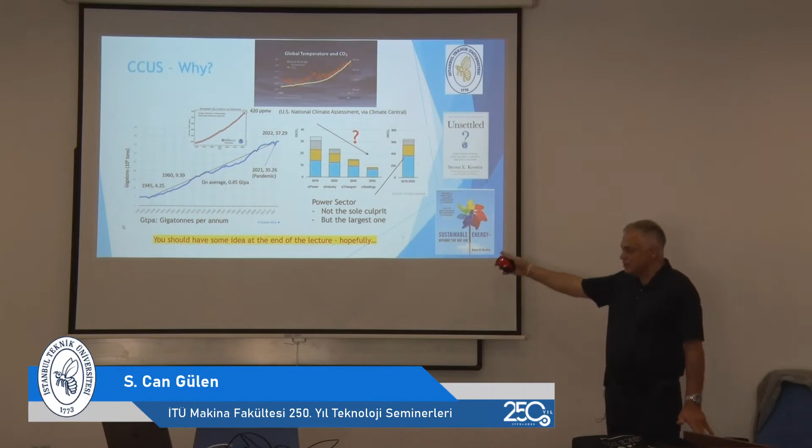I highly recommend looking at that book by Steven Koonin. He's a physicist, and he was a science advisor to the Department of Energy during the Obama administration. He has something to say about these strong conclusions. As far as sustainable energy, this book on the lower right by David MacKay—he passed away several years ago—is by far the best resource to read and understand, and it's available on the web as a free PDF. Download it and read it.

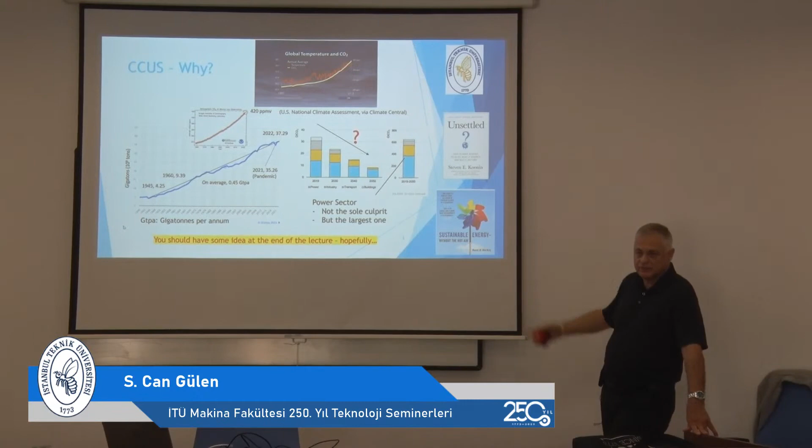In the technology space, as far as carbon capture, you have a feedstock, it's a hydrocarbon fuel. You burn it and make something with it, and the gases that result from that combustion contain carbon dioxide.

In order to mitigate the carbon dioxide associated with that process, you have several possibilities. I'm only showing the most important ones here. Post-combustion carbon capture means capturing the CO2 from the flue gas, the stack gas of power plants. Pre-combustion is basically taking a feedstock like coal, gasifying it to make a syngas, and that syngas, after a water-gas shift reaction, contains CO2 at higher pressure and higher concentration, so it's easier and less expensive to capture.

That's one way. The other way—and there is also a technology recently promoted—is called oxy-fuel combustion. Instead of air, you use oxygen, which of course must be produced first, so again it's an expensive process. But if you do that, the exhaust gas contains only CO2 and H2O, water vapor. As I'll show later, if that can be done in a closed loop system, you can easily capture CO2 by condensing the water out in a water-cooled condenser. Then there is chemical looping, which right now you can read about.

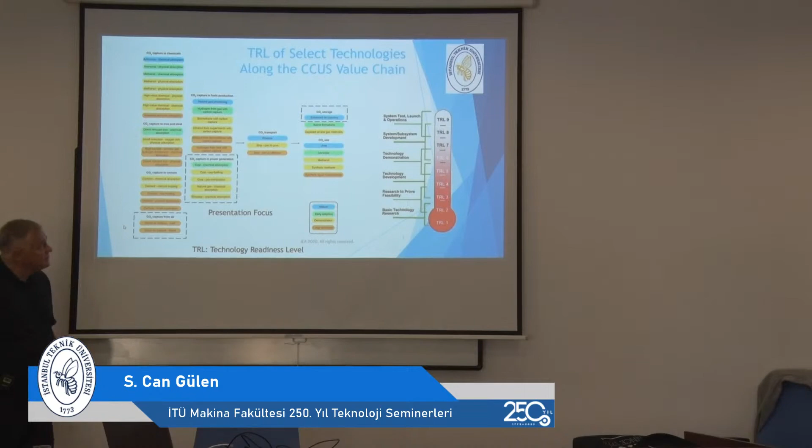I will talk a little bit about the chemical absorption technology to capture the CO2 from the flue gas, and about hydrogen from gas with carbon capture, which is the pre-combustion approach. And then I will talk about enhanced oil recovery, because it's the most used technology to make something with captured CO2 at commercial scale.

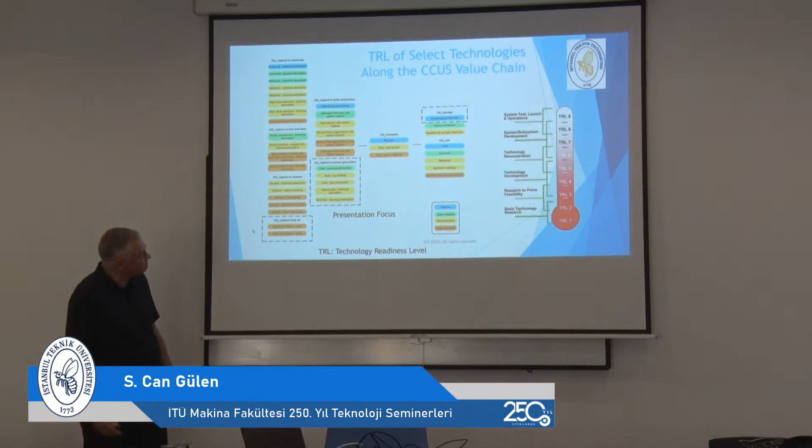Okay, some numbers. Again, in order to be able to talk about the subject, you have to be conversant in the numbers. First of all, today, atmospheric CO2 concentration is measured rigorously since the late 1950s in an observatory in Hawaii. And today, the number is about 420 parts per million by volume, which corresponds to 0.04% by volume in air.

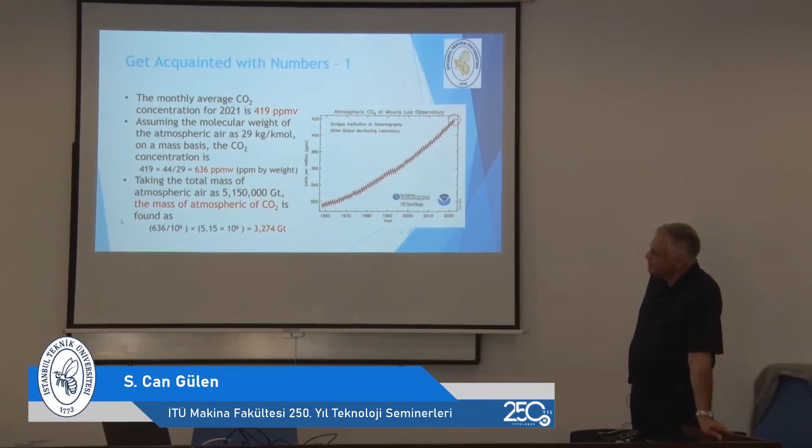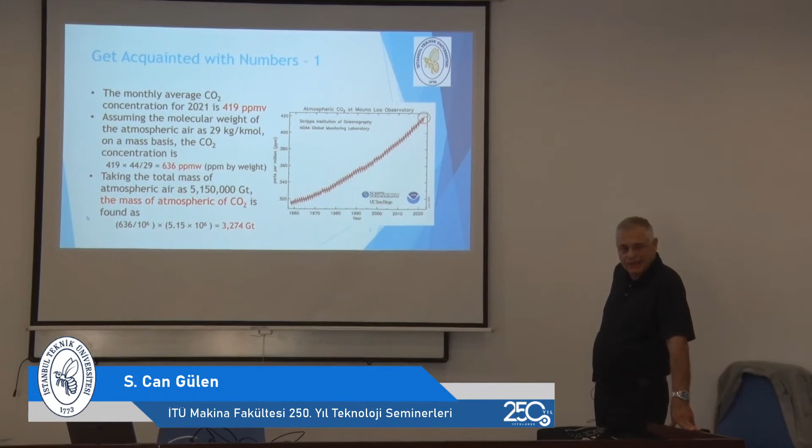By weight, it's about 640 parts per million. Total mass of atmospheric air is about 5 million gigatons. And therefore, you can calculate that there is about 3,300 gigatons of CO2 in the atmosphere. So this is the number that we're talking about that's causing us problems for global warming.

Now, as I said, one way to mitigate CO2 emissions is to eliminate or capture the CO2 in the flue gases from thermic power plants. There are two types of plants today: coal-fired plants and natural gas-fired plants. So if you know the heat rate of the power plant, which is the efficiency, and the lower heating value of the fuel, you can easily calculate the carbon dioxide footprint of the exhaust gas of that system.

The formulas are very simple. You can find them in the chapter which I had written in that handbook. But they are simple—you can just copy this and do the calculations with pen and paper.

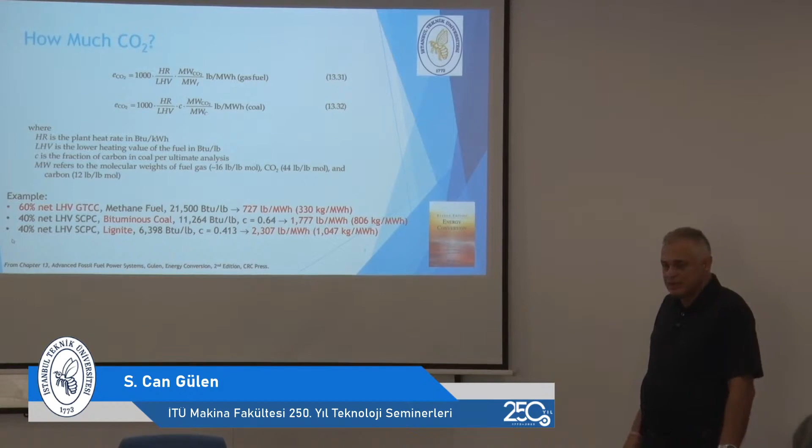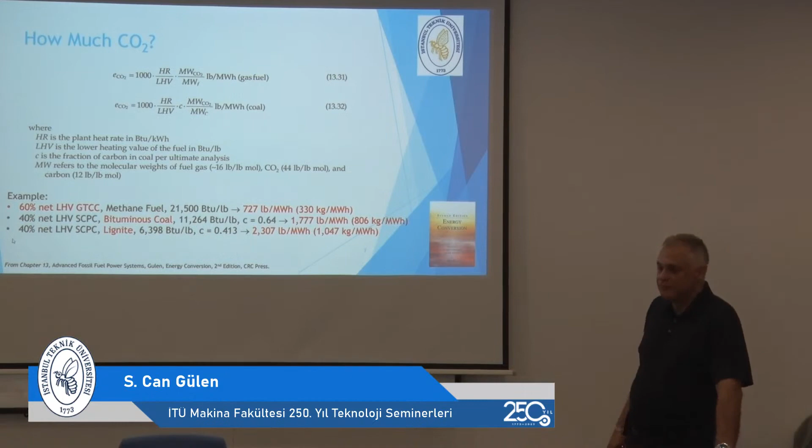If you are talking about a supercritical pulverized coal power plant at 40% efficiency, which is not bad, you're talking about 800 kilograms per megawatt hour of generation. And if you are using a dirty, problematic fuel like lignite, then you are talking about more than 1 metric ton of CO2 per megawatt hour generated.

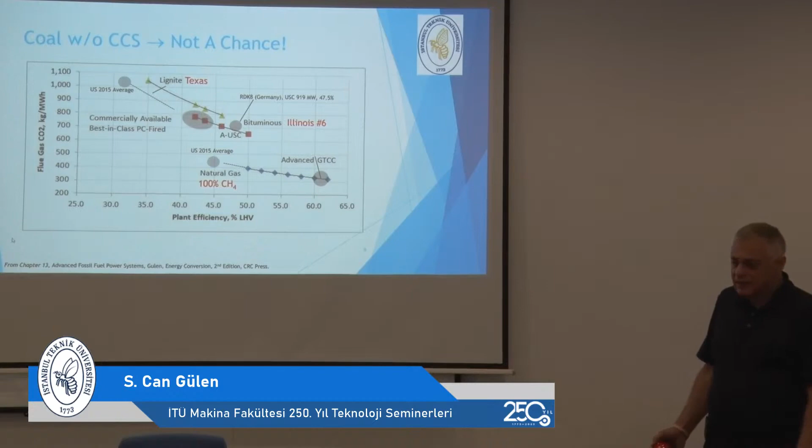But as you know, the reality of life is such that coal is still being used very heavily in many parts of the world. In the United States, it's on the wane. But the reason for that was not the kindness of the hearts of the people in the energy industry—it was just bare economics, because with all the environmental regulations imposed on coal-fired power plants to scrub the stack gases, the price of a coal-fired power plant is much, much higher than a natural gas-fired combined cycle.

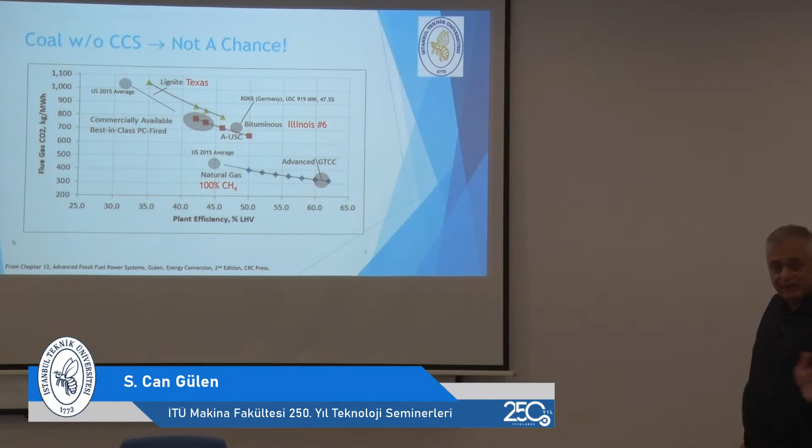So they are being phased out and not being built anymore, and therefore today natural gas power generation in the United States actually surpassed coal-fired generation.

Now some more numbers. Again, the numbers that I'm more familiar with are, of course, United States ones, but you can expand or extrapolate to other situations in the world. The answers are not going to change much.

From all the power plants in the United States, about 0.95 gigaton of CO2 emissions come from coal-fired generation, and about 0.56 gigaton comes from natural gas-fired power generation, which is of course commensurate with what I have shown earlier. So a total of 1,510 million metric tons. And if you do the math again, which is very simple as shown here, it corresponds to about 0.2 parts per million by volume.

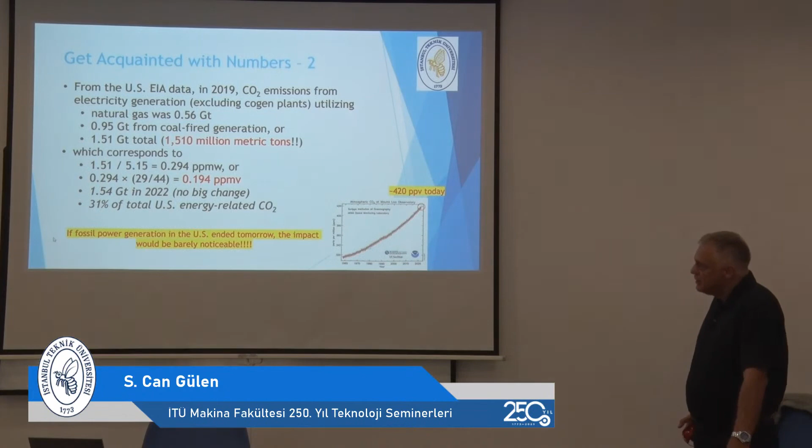So here is the reality that we are facing. Forget about all the hoopla that you read.

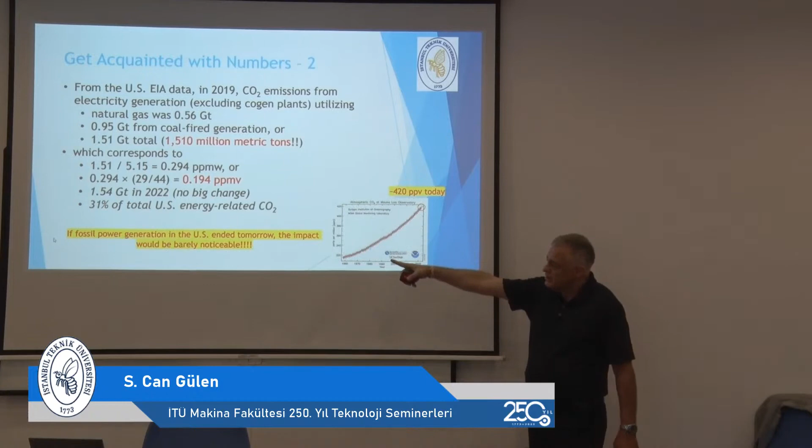Today, the average in the atmosphere is 420 parts per million by volume. If I stopped all the thermal power plants in the United States tomorrow, shut down, gone, the impact is 0.2. And I can guarantee you all the cows farting in India are going to negate that. So, okay, I'll leave it at that.

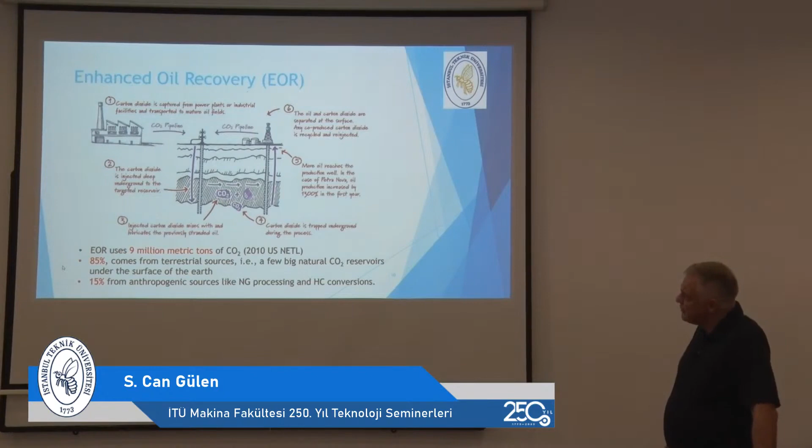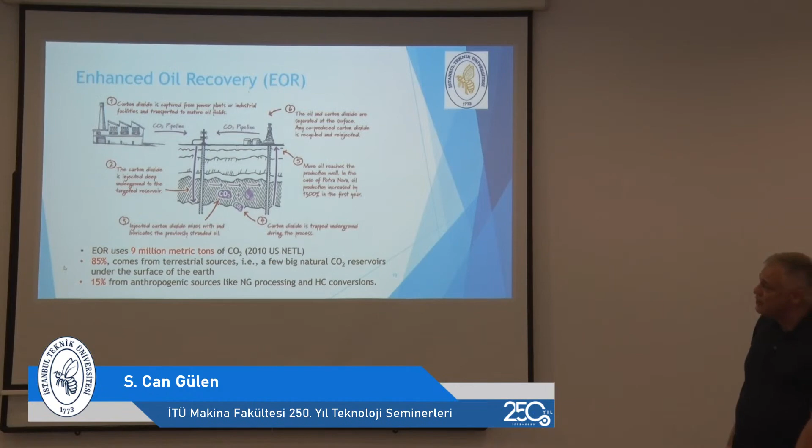Enhanced oil recovery: you capture the CO2, but what are you going to do with it? You have to either store it, find a place to stick it in the ground, or do something with it. You can only produce so much fertilizer, so much Coca-Cola and Pepsi-Cola. So this is the most widely used industrial way to make use of captured CO2, and it makes a lot of economic sense because oil producers are willing to pay for it. They need it to get oil from underground where it's difficult to extract otherwise.

Today, the 2010 number in the United States is about 9 million metric tons of CO2 used for enhanced oil recovery.

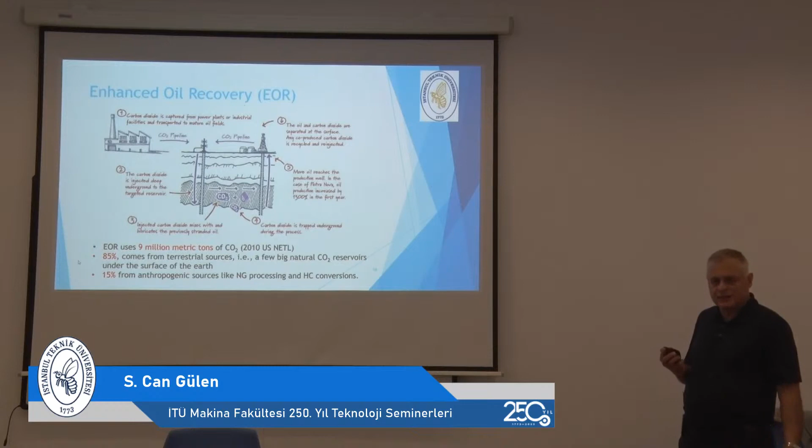Where is it coming from? Believe it or not, there are natural CO2 reservoirs in the country where CO2 resides underground. That should soothe the nerves of those who ask, if you capture CO2 and store it underground, what if it escapes? It's not that easy to escape. It's not going to happen like it did in one place in Africa some time ago, where a big carbon dioxide release from underneath a lake came out as a huge bubble and killed everybody around the lake. Something like that won't happen if you do it right.

And there are naturally occurring examples where that CO2 is the source for enhanced oil recovery. The other source is from other places — I'll talk about this a bit later — carbon captured from other industrial processes.

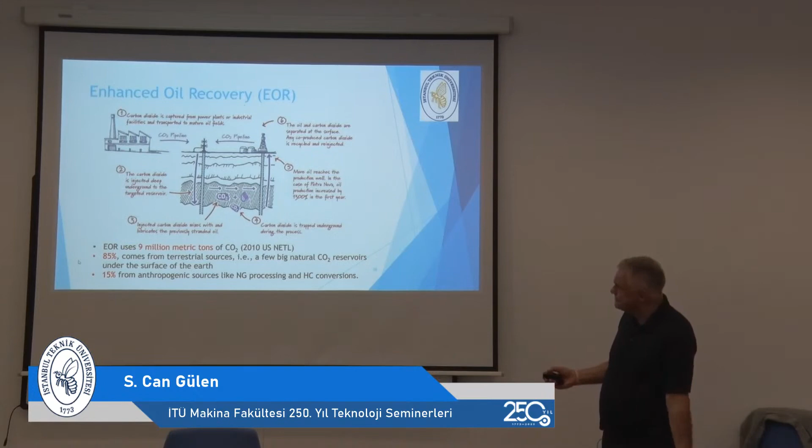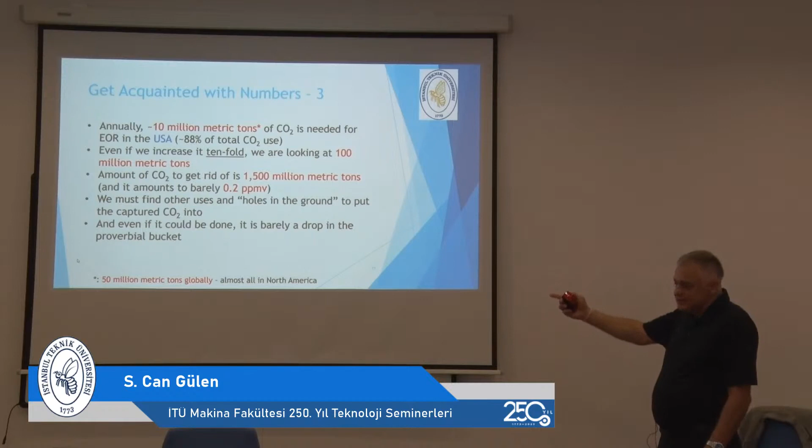But let's look at the numbers. Let's say it's 10 million metric tons of CO2 needed for EOR in the United States today. Say we increase it tenfold — impossible to do in any meaningful amount of time — so that's 100 million metric tons. But I just showed you the amount of CO2 we have to get rid of is 1.5 billion metric tons. Do you see the magnitude of the problem? We have to find other uses and holes in the ground to stick the CO2 into in order to make any meaningful difference. And even if it could be done, as I showed earlier, it's barely a drop in the proverbial bucket.

So let's look at the thermodynamics. Capture is a mysterious process — we don't really know what's going on inside, so let's simplify it and call it a black box. Whatever is happening in it, the bottom line is you have a feed stream, which is the exhaust gas from a power plant containing CO2, and the red text underneath that feed stream shows the amount of CO2 from different sources. Then that capture process creates two streams from that single feed stream: one is the product stream, the CO2-free gas, and the other is a product stream that's basically CO2 with very high purity.

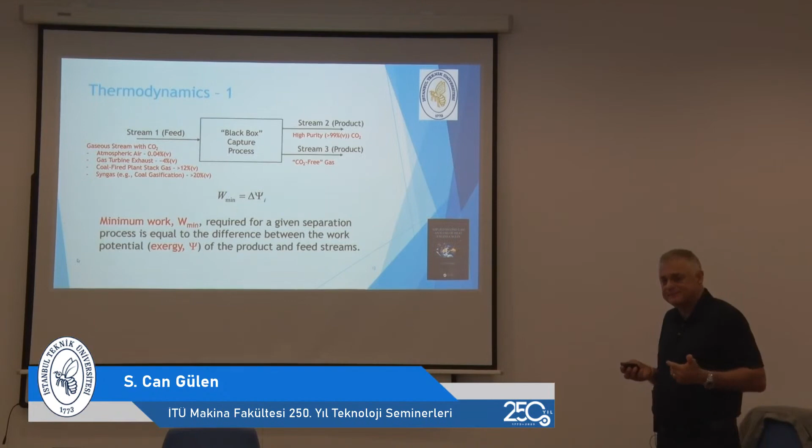So the question becomes, as I said in the beginning, you're talking about a process requiring many, many megawatts — how much exactly? I didn't show you a flow sheet model of a carbon capture process here because it's so complex, complicated, and busy you couldn't see anything meaningful. But let's start from basic principles. The minimum work needed to accomplish this is given by the second law of thermodynamics — it's the net work potential, which is the exergy of the product and feed streams.

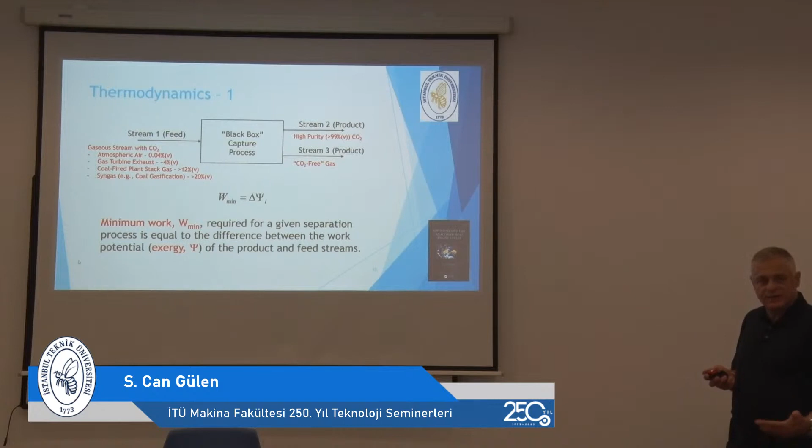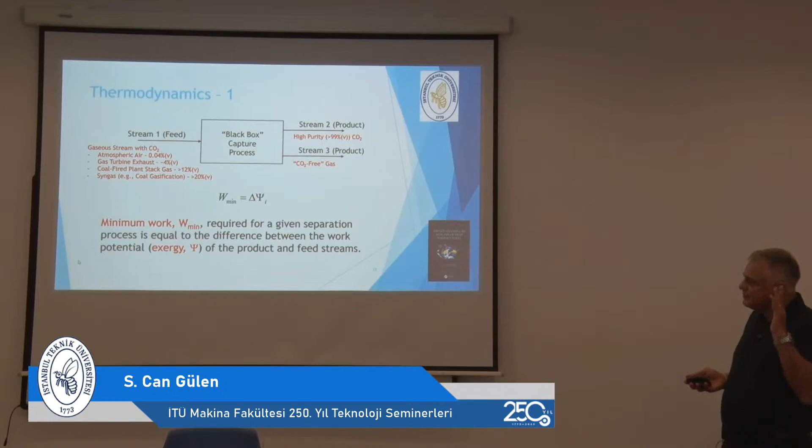I'll leave it at that because otherwise we'll run out of time, but you can find this shown in a book I recently wrote and published, Second Law Analysis. There you can find it applied more practically, but really any thermodynamics textbook you used in your introductory class — even an old copy of Van Wylen and Sonntag — will cover it. Hear me now, believe me later. This is it.

It can also be shown that this exergy quantity, which comes from the second law of thermodynamics, if you are talking about a constant pressure and constant temperature process, is equal to the change in Gibbs free energy. And for the simplified process shown earlier, at constant pressure and temperature, you can very easily calculate that number if you know the compositions of the feed stream and the product streams.

The underlying theory is explained in this book by Jennifer Wilcox. I highly recommend it to those who are serious about carbon capture. It's very illuminating in bringing up and explaining the theory of carbon capture. But at the end of the day, the formula you have to use is just this, believe it or not.

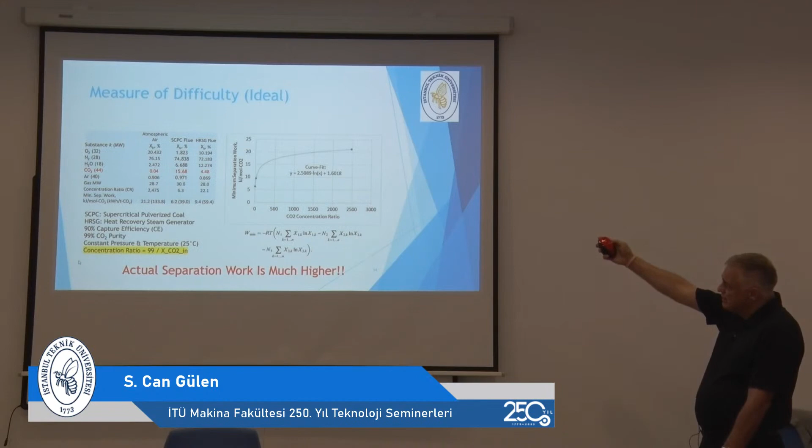And if you do that with different types of gas feed streams, you will see the behavior shown on this graph. It's simple to understand even without any math.

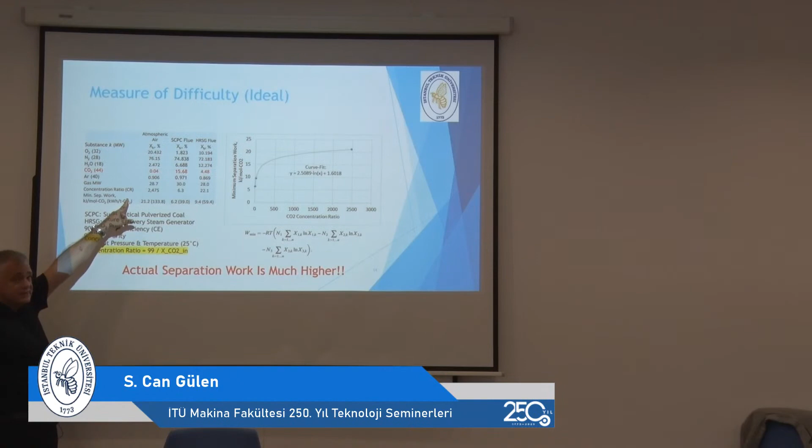Atmospheric air contains, as I mentioned, 420 ppm by volume CO2, which is 0.04% by molar concentration. The minimum separation work is about 134 kilowatt hours per ton of CO2 captured.

If you talk about a coal-fired power plant, where the amount of CO2 in the flue gas is about 16% by volume, orders of magnitude higher, the minimum work is only 39, much lower, right?

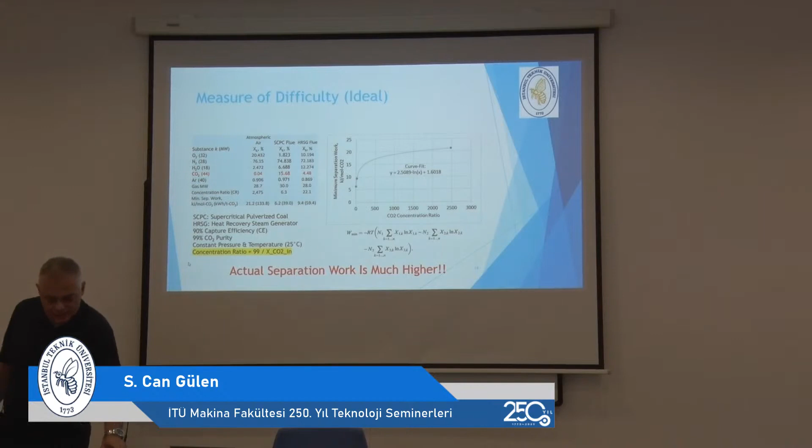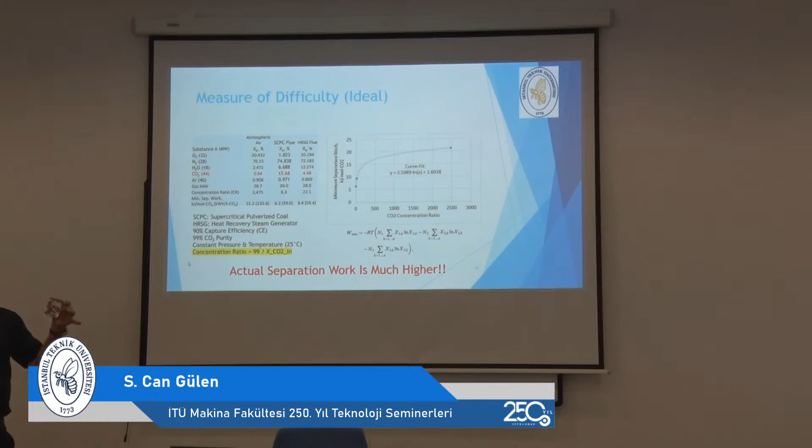And you can think about it this way. Let's say you have a bigger box with 10,000 white balls in it. Now, which is easier: to find the 4 black balls in that box, or to find like 1,560 or whatever balls in there? Of course, the latter, right?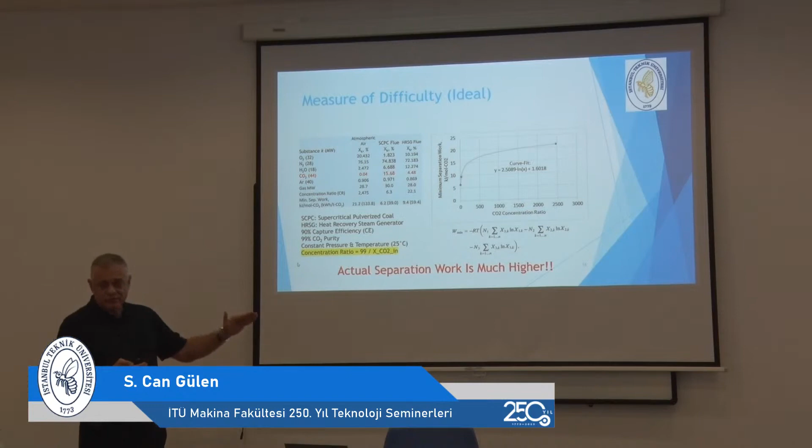The same principle also happens when you try to pick the CO2 molecules out of that gas. The higher the concentration of CO2 in the feed stream, the easier it is to do.

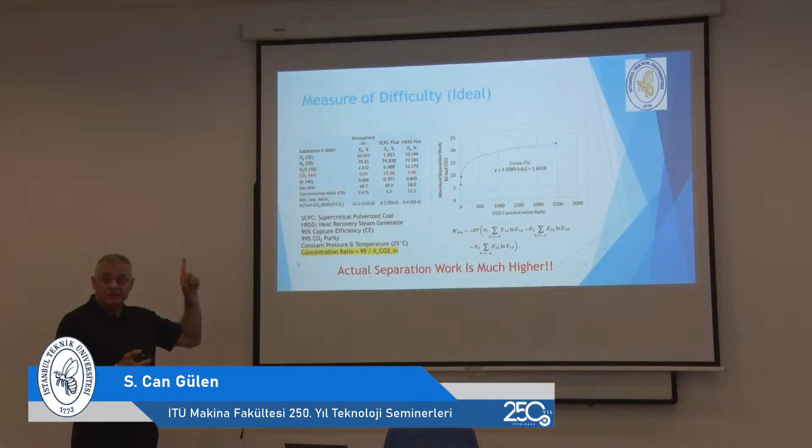And the numbers do not seem too horrible, right? I mean, you know, why are we not doing it? Because these are the ideal numbers. Actual separation work is much, much higher.

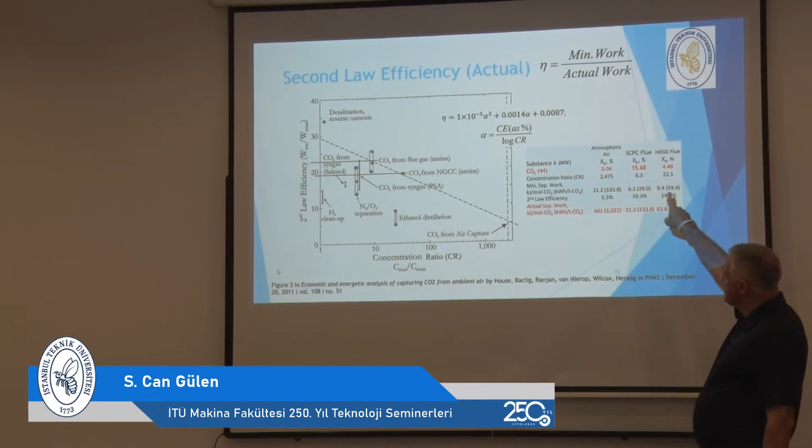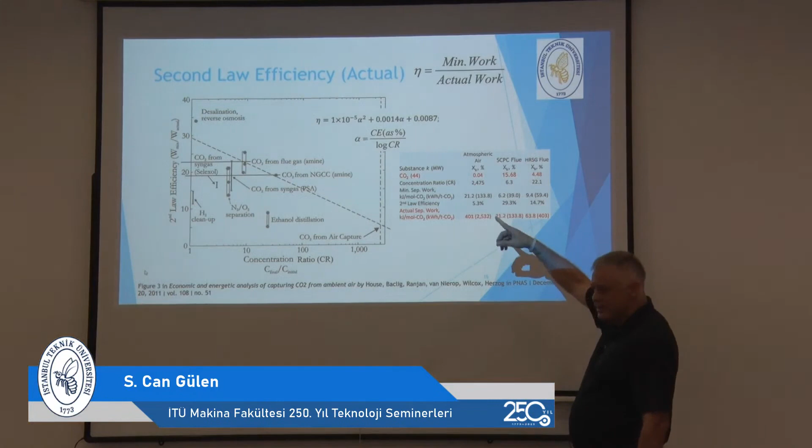So if you apply it to the minimum works that were calculated in the previous slide, using a curve fit from a paper by Wilcox, which you can also find in her book, but this one is from the paper cited here, and if you use the efficiencies, these are the numbers you end up with.

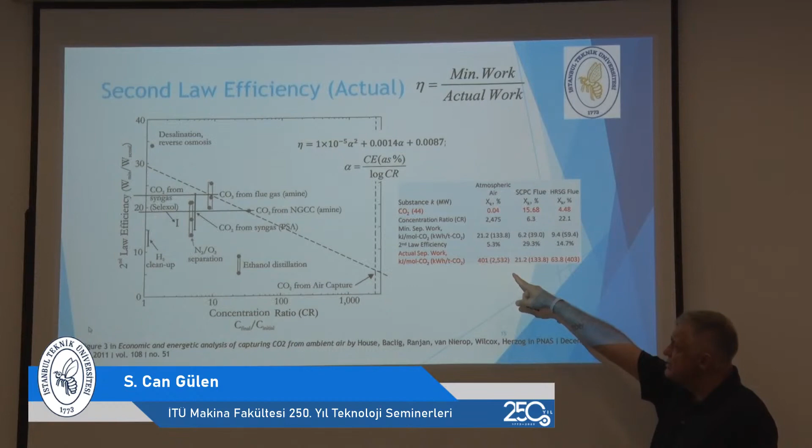For example, if you want to remove CO2 from the atmospheric air, which is called direct air capture, which I'm going to discuss in the final slides, the actual work can be as high as 2,500 kilowatt hours per ton of CO2. It's a crazy idea, basically.

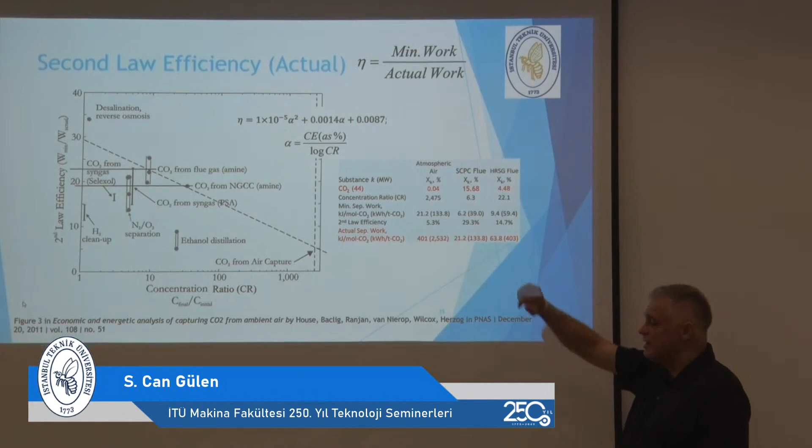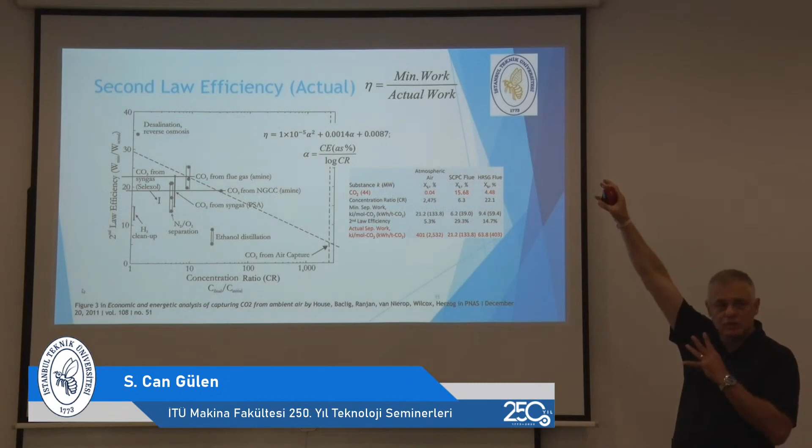But even the easier cases, these are big numbers. For example, for the combined cycle, it's about 400 kilowatt hours per captured ton of CO2, which is a big number, as we will see. But these two slides give you everything to calculate, to make a reasonable estimate of what is involved in carbon capture, in terms of energy and power requirement.

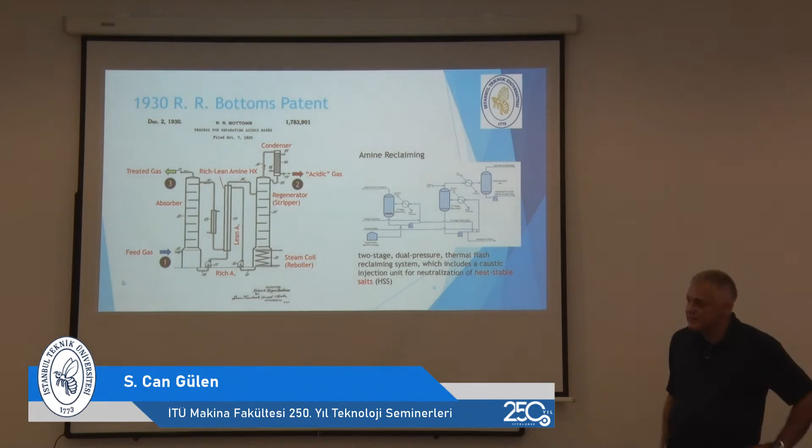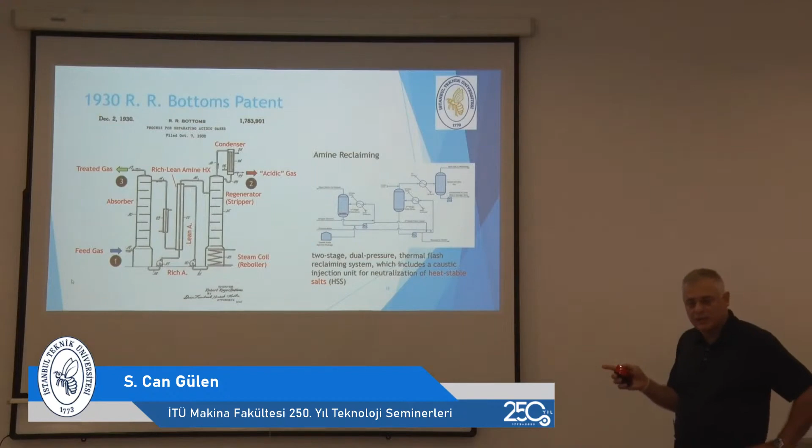The most widely used technology is chemical absorption, and it's not a new technology. It was invented in 1930 by Mr. Bottoms in the United States, and he obtained a patent for it. The picture on the left is from his patent, and believe it or not, today, 80 years later, this is still the process being used to remove CO2 from gases.

For example, in the chemical process industry, it may barely become feasible, but there is a caveat, as we will see later.

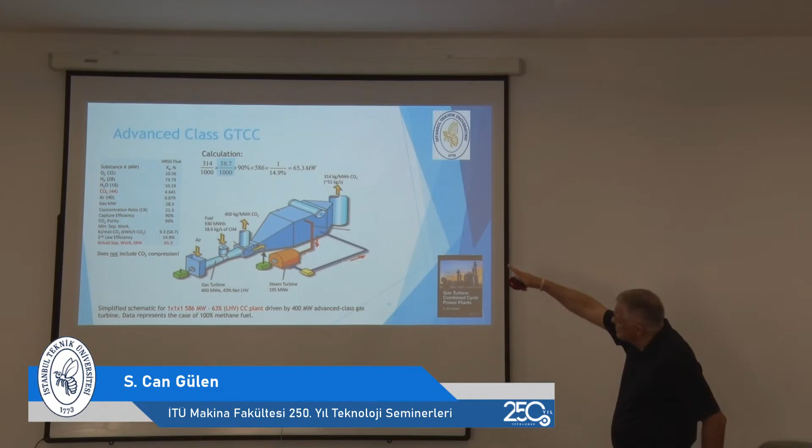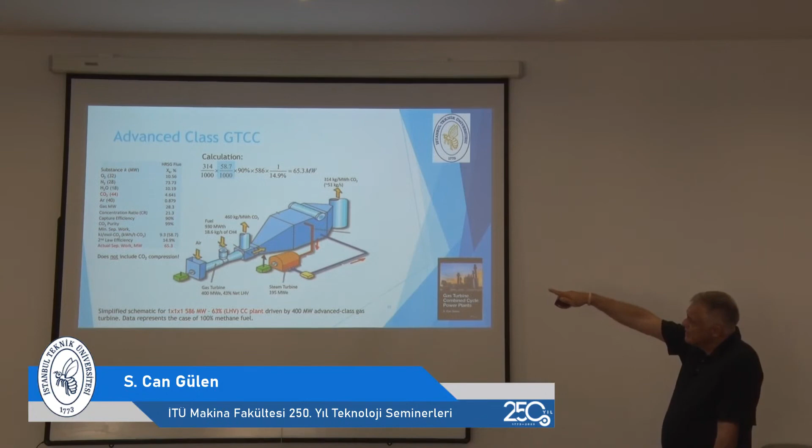This is a typical advanced class gas turbine combined cycle, about 600 megawatts, 586 to be exact, with 63% net LHV efficiency with an advanced gas turbine. Its carbon dioxide footprint is 314 kilograms per megawatt hour CO2, and for 90% capture to be applied to this power station using the methodology shown in the previous slides, you are looking at 65 megawatts of power to be spent, which has to be subtracted from that 586.

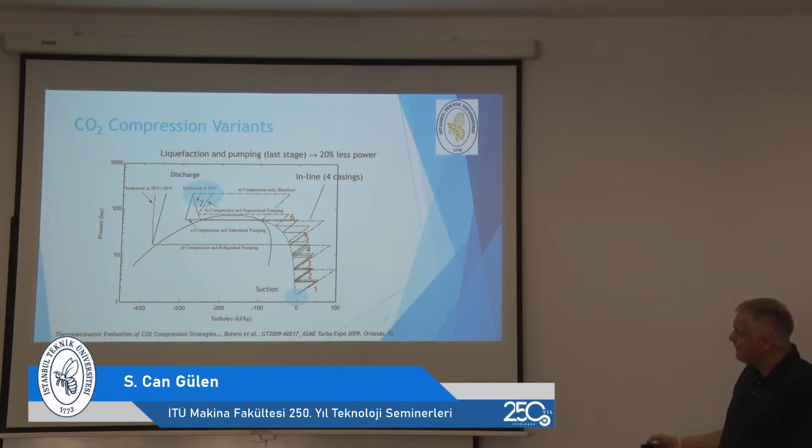That doesn't include the compression of the CO2, which has been captured, okay? Because as we have shown earlier, when you capture the CO2, you have to do something with it. In order to do something with it, you have to transport it to some place through a pipeline. In order to be able to do that, you have to compress the CO2. The final pressure of the CO2 depends on the use, okay?

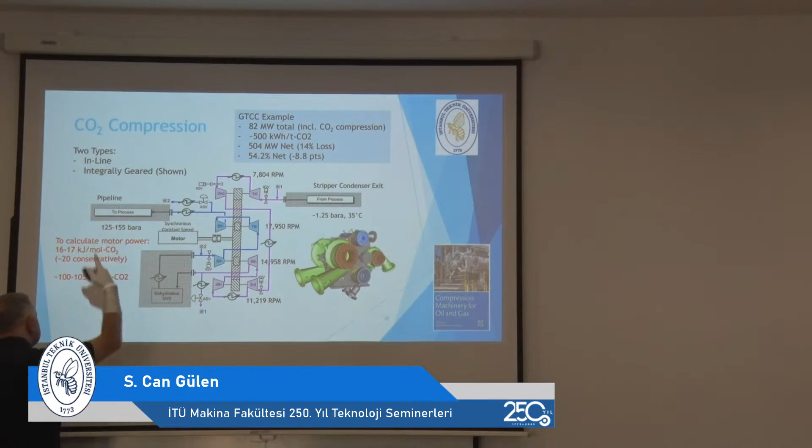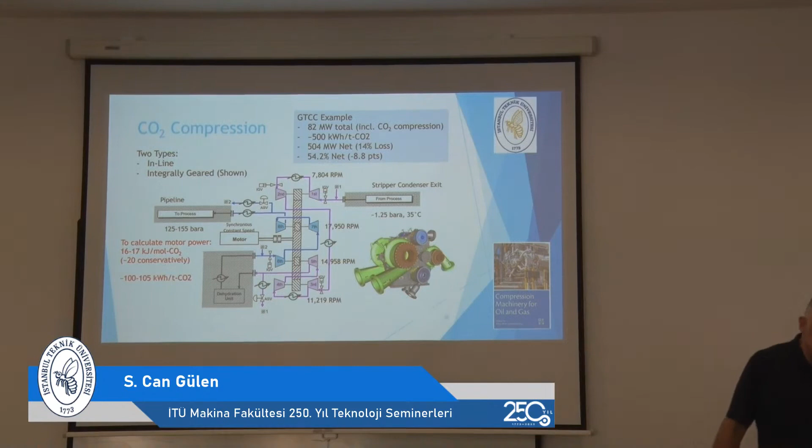If it's enhanced oil recovery, which is 1,000 miles away from your power plant, you may need more than what is shown here as an end pressure, which is 125. So the range can be anywhere between 125 bar to 155 bar. And the CO2 gas pressure at the end of that regeneration process is slightly higher than 1.1 bar, 1.25 bar. So it's a stupendous amount of CO2 compression that you have to add to that 65 megawatt, which is just the capture work.

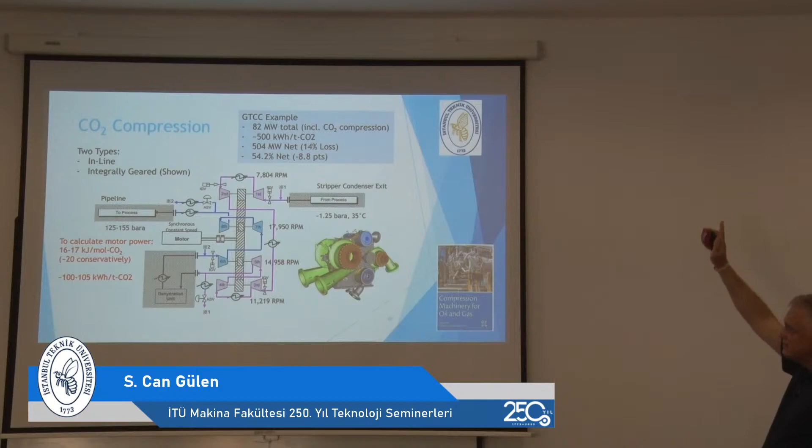And so the total comes to 82 megawatts. Your 586 megawatt power plant becomes a 500 megawatt power plant, 14% loss, which was actually the number shown in that slide. And from 63% net efficiency, you come down to about 54%. And the capture work is about 500 kilowatt hour per ton of CO2.

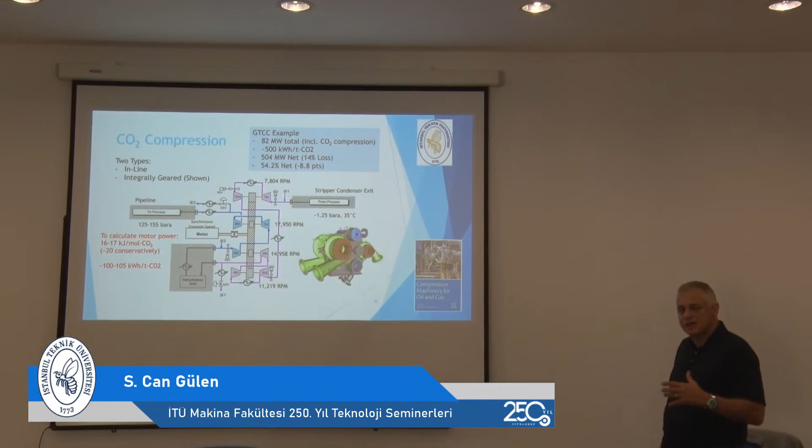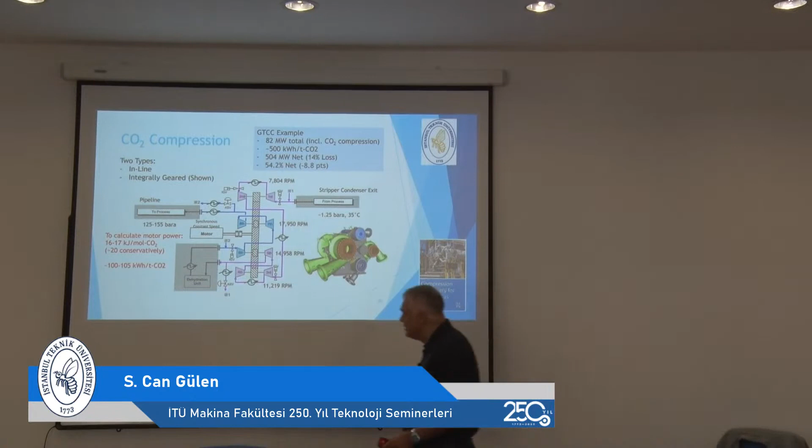So these are realistic calculations, but if you really look at a power plant, depending on the site conditions and all the other stuff, you may end up with much higher than that. So it's on a case-by-case basis. So here, this is the type of number that you have to figure for compression, about 100 kilowatt hour per ton of captured CO2. There are two types of compressors that you can use, and you can read about that in that handbook in the lower right corner.

Again, it's a book that I highly recommend. If you can find it, get it, or if you can find it in your school library, take a look at it. Two types of process compressors that can do that, inline or integrally geared. This is not a simple compression process, as you can see from that integrally geared compressor configuration, because in order to get the best performance across such a high pressure compression ratio, you have to divide the compressor into different sections that have to rotate at different speeds, which is done by that gear arrangement.

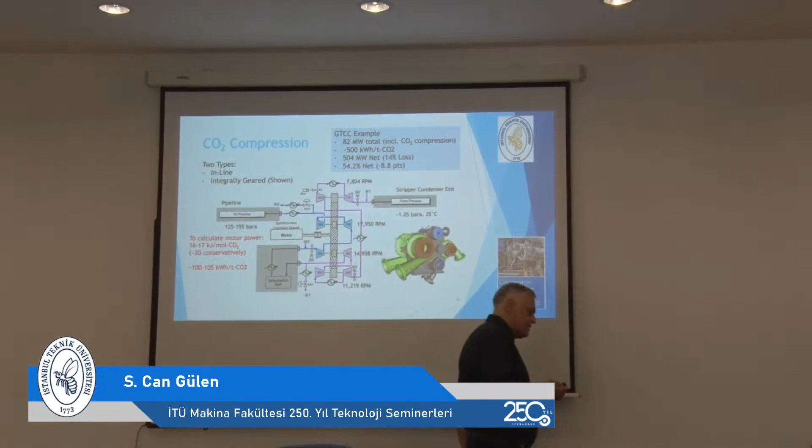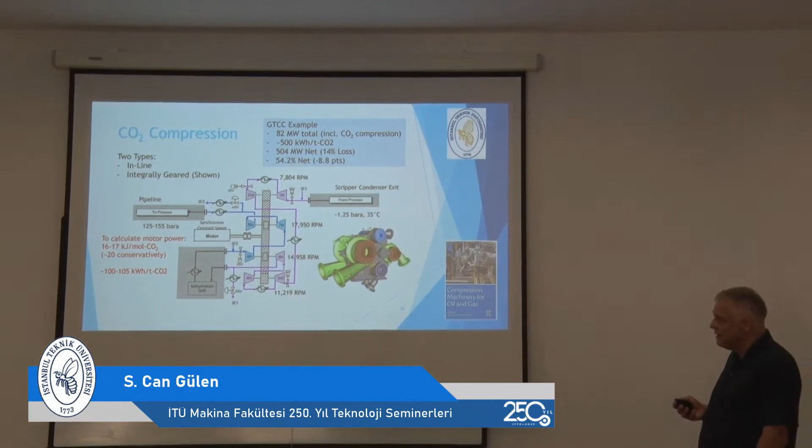Today it is considered a mature technology, okay, but there are still some bugs associated with it, and it's difficult to find out about these problems. But the scuttlebutt that we heard about the Petra Nova capture demonstration was they had some problems with those integrally geared compressors there. So inline compressors are going to be less efficient, therefore they are going to consume more power, but they are going to be more reliable. And in a power plant, reliability is a more important consideration than efficiency.

This is interesting. So CO2, if you compress it,

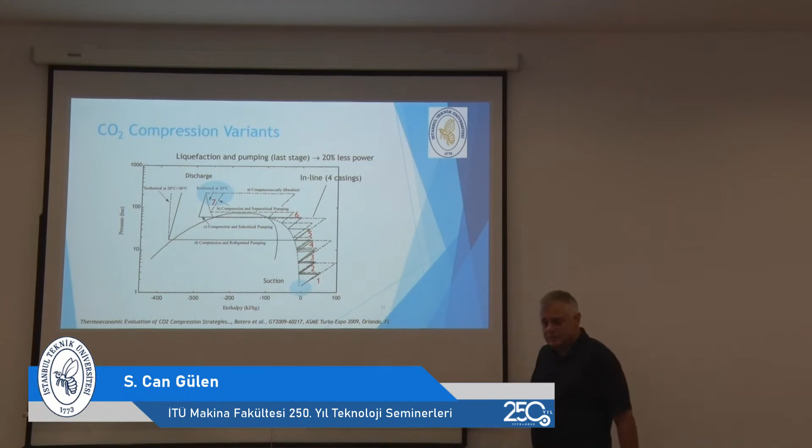I have to go back to English. So that's a huge compression to 120 or up to 150 bars. The critical pressure of the CO2 is about 74 bar, I believe. So you are going to supercritical pressures. In order to reduce that compression power, they are looking at some gymnastics. So there are different stages.

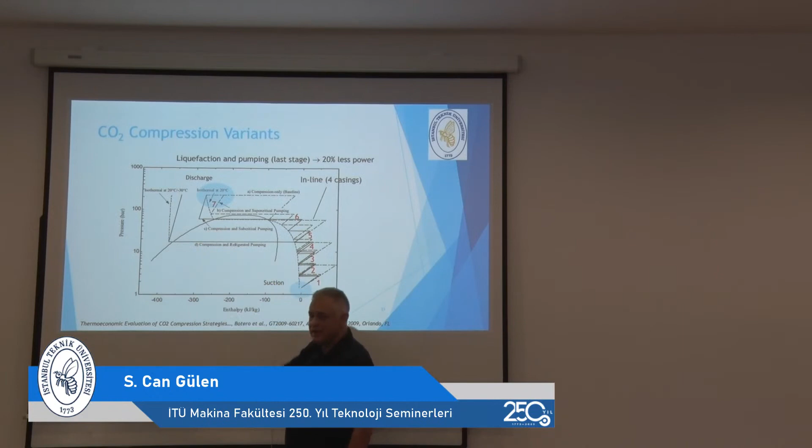Stage 1, compression, intercooling, compression, intercooling, compression, intercooling. You come up to here, and then you cool it, and then you bring it to this region. And instead of a compressor, the last stage is a pump. It consumes less power. Or you go even crazier. You go not to the 6 or 7 stages, but only 4 stages, and then you cool the carbon dioxide cryogenically. You end up at this very low temperature, and then you pump it.

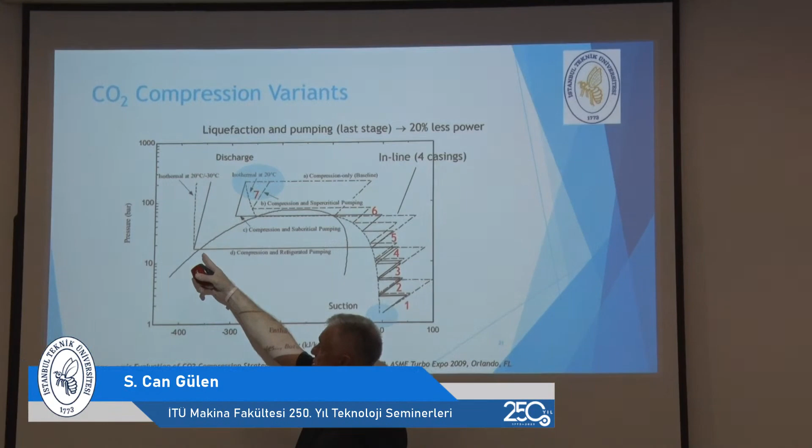Okay, but those are ideas. I don't think they are going to be implemented anytime soon. Very complicated. Yeah, about 30.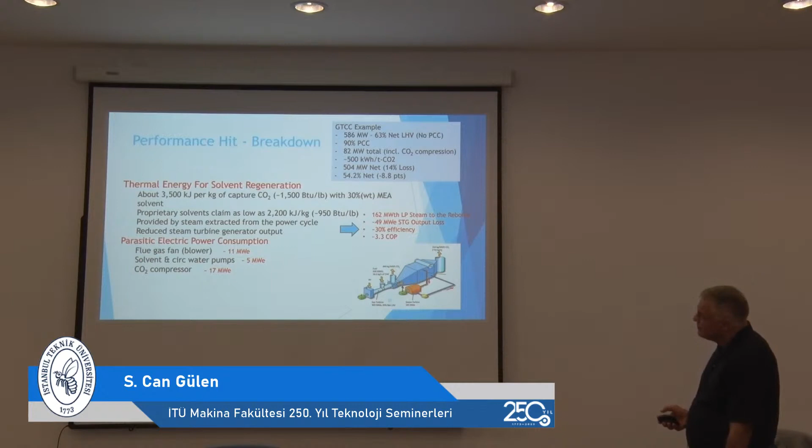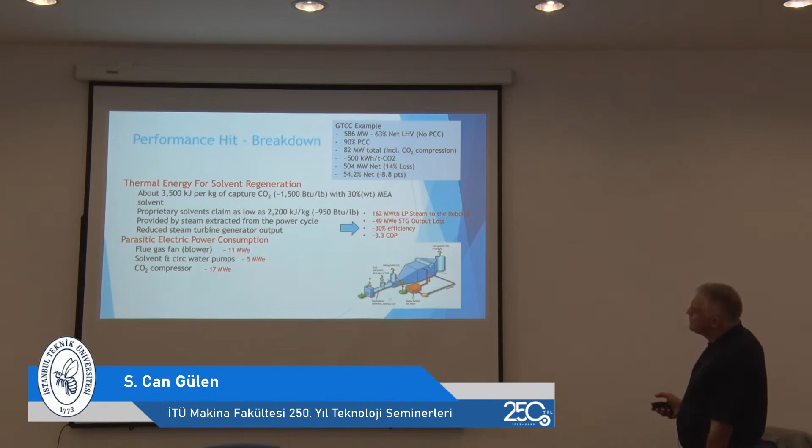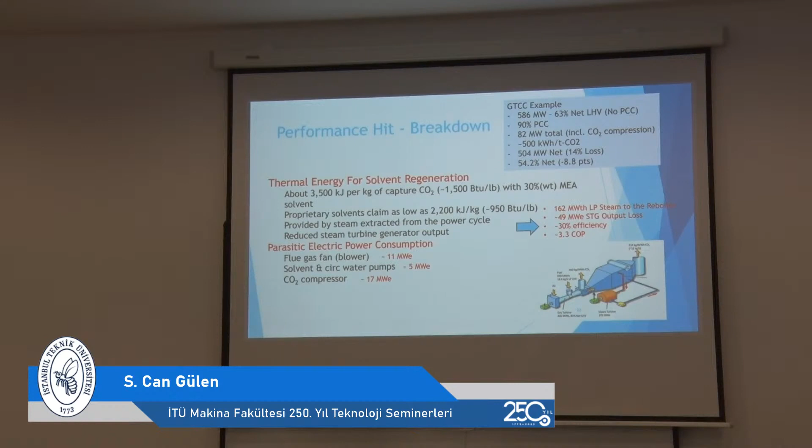So this is the performance hit breakdown. So we calculated it, 82 megawatt including the CO2 compression. So 49 megawatt of it, first of all, comes from the lost steam turbine power output, because you have to extract the steam, which is going to be the heat source for that reboiler in the regenerator.

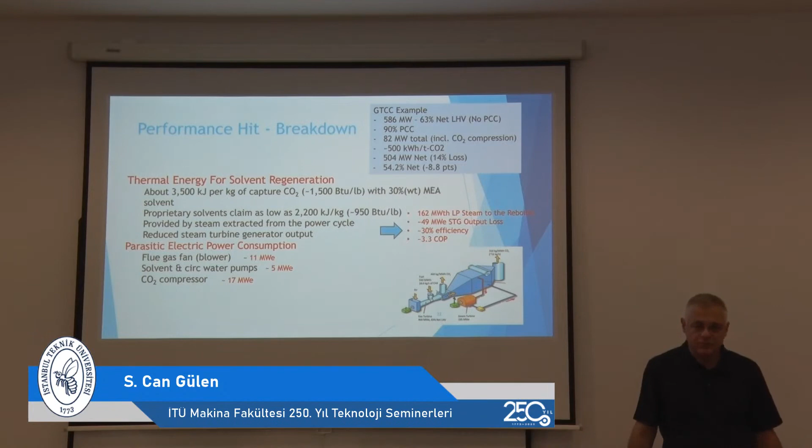Okay, and that one is a large amount, because this is the amount of heat that you need to do that regeneration. It's 162 megawatt thermal, which comes from low pressure steam extracted from the steam turbine, and you end up with a reduction of 49 megawatt of output. So those are the things that come into consideration. Again, you can easily calculate this stuff because you know the flue gas, okay?

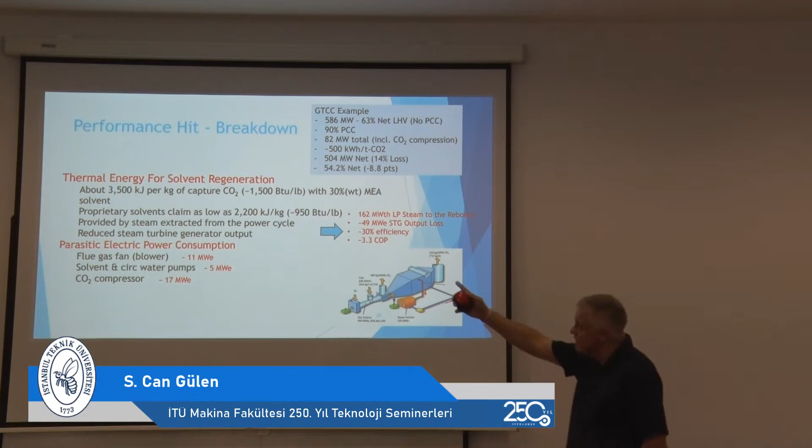You know the flue gas composition. With that, you can calculate the CO2 coming out with the flue gas. When you say 90% capture, you find the amount of captured CO2. And with the standard amines, you need about 3,500 kilojoules of heat energy to do that. And with that, you can easily calculate how much heat you need. And if you know that, you can find how much power hit is going to result in the steam turbine.

So all these calculations are easy to do for all types of power plants, and they give you a flavor of what is involved in real carbon capture. There are many projects. This I took from a 2014 paper. You can see that pretty much all of them have been canceled. Why? Because of that. It's very difficult to do. It doesn't become economic, costs a lot. They start, they come to a point and they say, screw it, we're giving up.

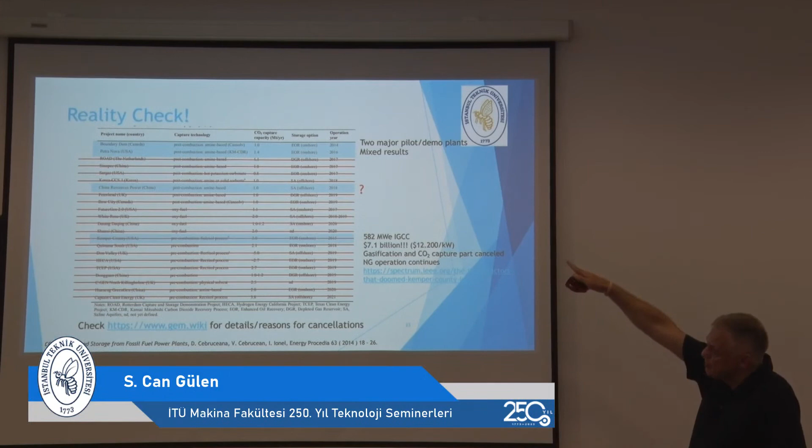You see, so many. Out of those, there are only 4. The one in China, I couldn't find any real information. It may or may not have been canceled yet. Those 2, Petra Nova and Boundary Dam, those 2 major pilot demo plants have been in operation. Petra Nova had closed in 2020, but it's reopened again.

Boundary Dam was using a proprietary solvent developed by Shell called Cansolv to do the capture, not a generic amine. And Petra Nova was using a solvent developed by Mitsubishi Heavy Industries. Japanese were behind it, and what I heard is it was closed because it didn't do what it promised to do. But the Japanese didn't give up on their technology. They bought the power plant, okay, the system, and they restarted it.

Kemper is a notorious example. It has been completed, to the tune of $7.1 billion, okay, more than $12,000 per kilowatt. It was an integrated gasification combined cycle plant with pre-combustion CO2 capture. Unfortunately, they were never able to make the gasification and capture part operate, and it was canceled. Now only the combined cycle part is running with natural gas. You can read about it. It's going to give you a good flavor of the difficulties involved in carbon capture.

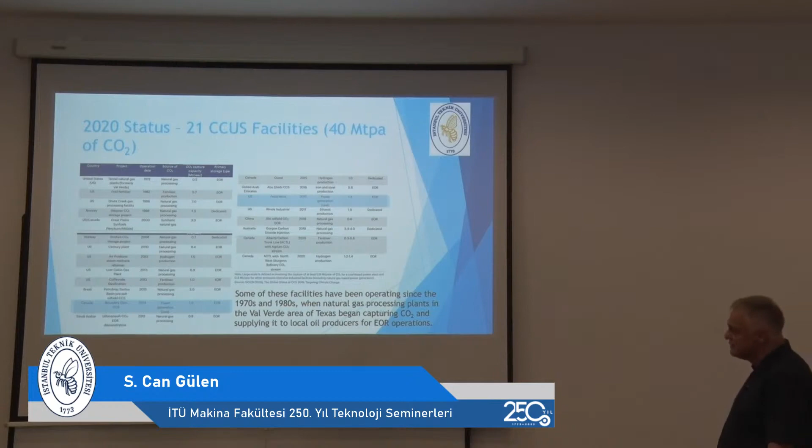As I said, carbon capture is done presently in many industrial facilities in the United States, and probably someplace else too, but these are only the large projects with more than 800,000 tons per year of CO2 capture, and the captured CO2 is used for different purposes shown there. But it goes back 40, 50 years.

It's a mature technology. But these are different processes, chemical processes, etc., where the carbon dioxide content in the gas which is being scrubbed is high, 30% maybe, can be more, and at very high pressures. So therefore, the process is easier, and the system is cheaper, and that's how it's done. It does not mean that because you can do it in a chemical facility, you can translate it easily to a power plant. That's a big difficulty.

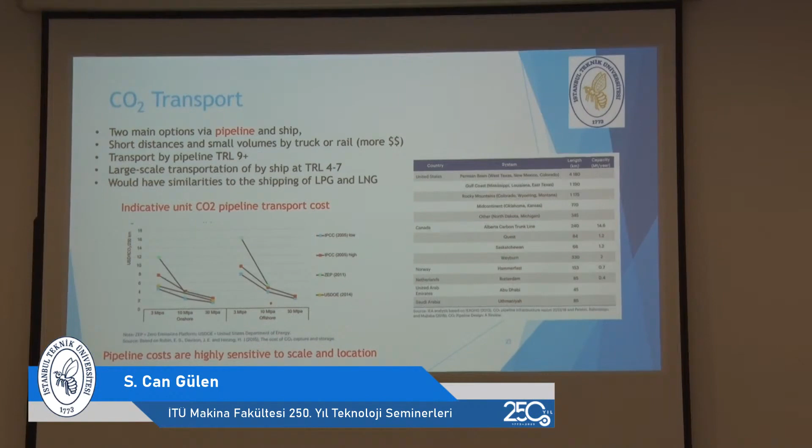Transport, of course, costs some money. So if you have a power plant in the middle of nowhere and you make the CO2, unless you are standing next to the place of use, you have to transport it. There are 2 ways to do it. And by far the common one is the pipeline. And this is how much pipeline transportation costs, shown in the lower left graph. And there are, I believe, about 6,000 miles of CO2 pipeline in the United States at present.

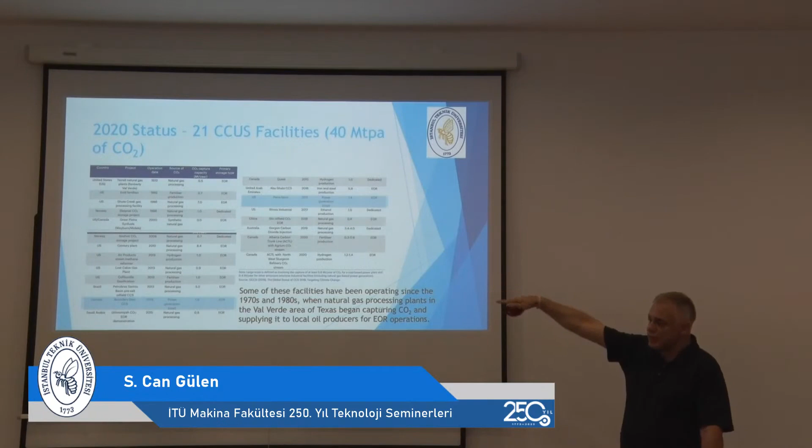And the main use is basically to take the CO2 from those facilities. And there are many more facilities like that, but with much, much lower amounts of capture. So CO2 captured here is basically transported all over the place in North America through that pipeline network. They are looking at ship transport, but it's very expensive. It's on a case-by-case basis.

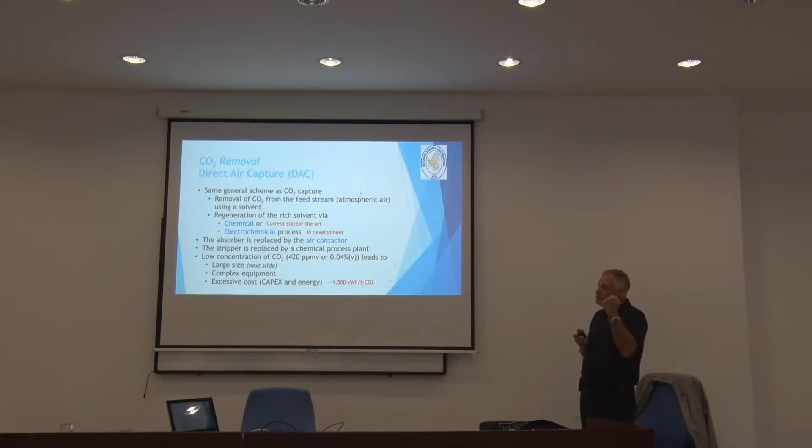And then finally, CO2 removal. This is the direct air capture. How many people here heard of direct air capture? Yeah, it's a crazy process. So you are trying to scrub that 420 parts per million CO2 from the atmospheric air. It's the same general scheme as the CO2 capture process that I described. It's the removal of the CO2 from the feed stream, in this case atmospheric air, using a solvent, and then regeneration of that rich solvent.

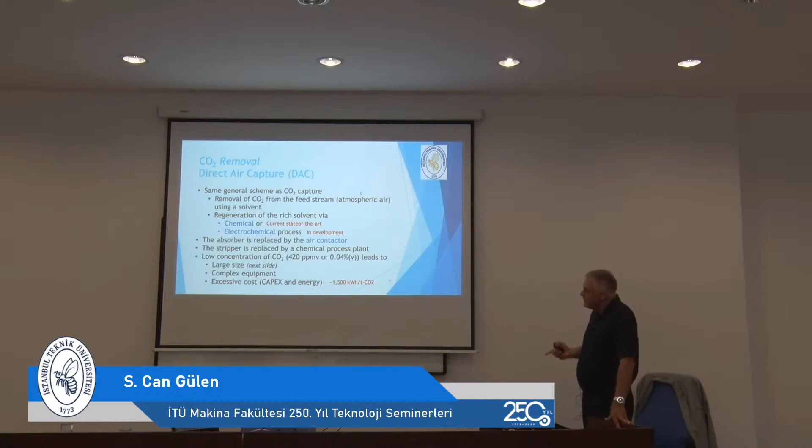And there are two options there. Chemical, which is current state of the art, which is much more convoluted than what I described for the amine-based process. Or there is a very neat process, electrochemical process. I know a lot about it, but I didn't include it in this presentation, so you can look it up. It's a very neat idea. It's as difficult to do as the other, but might have a chance. The absorber, that's a column, is replaced by an air contactor, which is very similar to a cooling tower with fill.

The stripper is replaced by a chemical process plant, quite complex, due to the low concentration of CO2 that you need to capture. It is very large. It requires complex equipment, and it's very costly in terms of capex and also energy. It's consuming about 1,500 kilowatt hour per captured ton of CO2, which, as I have shown, was only 500 for that post-combustion process for the gas turbine combined cycle. Today, the optimal capture rate is found to be around 75%.

In order to capture one tonne of CO2 from the ambient air, you have to process 1.81 million meter cube of air. And to do that in this air contactor, if it's 10 meter high, which is like a 3-story building, you need this to the tune of 4.6 kilometers. And if you make it 20 meter high, you need 2.3 kilometers of this to capture a meaningful amount of CO2 from the air, okay?

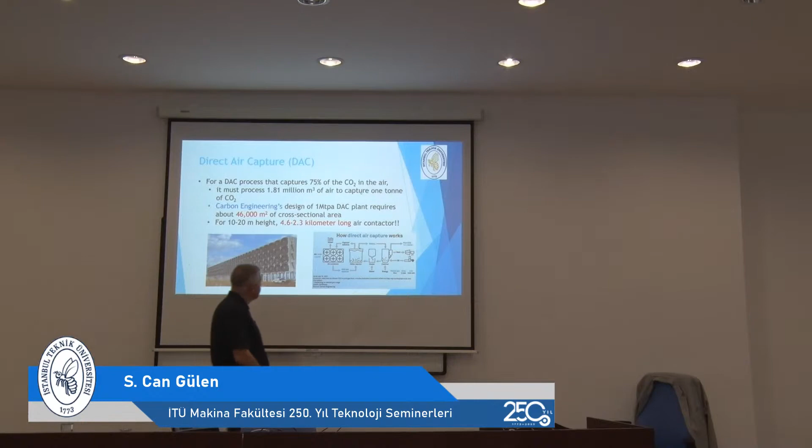Well, I leave it to you. And then, as I mentioned, once you have that solution, which is CO2 rich, you have to go through a very complicated process, which requires a lot of heat and power. I mean, forget about it. That's why I said the electrochemical process is much more elegant, simpler, but of course it also consumes power, and it's going to need that contactor also.

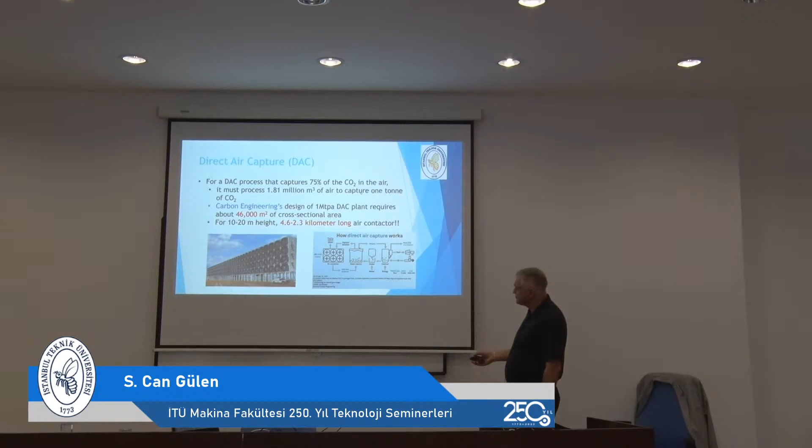And so if you do some math, we saw the numbers, right? Average US coal-fired generation: 1,000 kilograms of CO2 emitted for each megawatt hour of generation. The number is 400 for average combined cycle natural gas-fired system. DAC, direct air capture consumption, is 1,500.

So therefore, just look at the coal-fired one. 1 ton of CO2 emitted for each megawatt hour of generation, okay? But you capture only 0.7 ton of CO2 with direct air capture. So you have a deficit of 0.3. So you build a 4.6 kilometer long system at whatever cost,

and all you do is, if there's a lot of CO2 generation by coal-fired generation in your area, you're not even removing carbon dioxide from the atmosphere. There is still a deficit. Now, if it's a natural gas heavy thing, then your net removal is only 0.3 ton for each megawatt hour. So, okay. I don't know. If you are willing to buy the Tower of Galata, I can sell it to you if you believe that this is going to work.